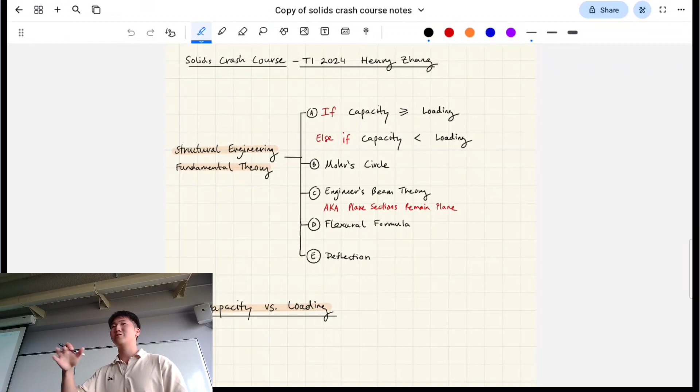Before we dive in, a bit of an overview. I like to start very general and get more specific. This course has a lot of formulas, especially at the start. The first 3-4 weeks will be rough, I won't lie. This course starts hard, and I think it gets easier. In contrast, fluids starts okay, then medium, then easy, then gets hard towards the end. But you'll find the right balance.

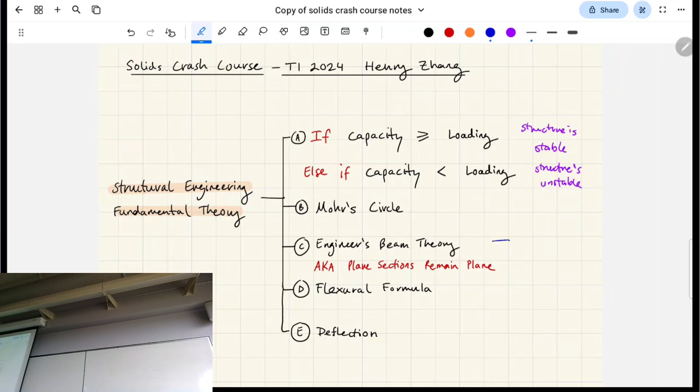Engineer's beam theory, flexural formula, and deflection - those are very important components, like outcomes of this course that you'll get as well. But that will be kind of covered from week 5 onwards, and Prash will be talking about it from a bit more theoretical point of view. Prash has a lot more experience than I am, and he's got some industry experience, and he's taught for a while, so he'll be able to tell you it from kind of that very applied point of view, so you can see how those things play into real life engineering design.

All right, so the first thing is capacity and loading. This is a very basic thing in theory, but I just want you to think about, for example, here's an I-beam - a steel I-beam. Can anyone think or tell me what gives this section of the I-beam its strength, and what causes it to fail?

I guess the loading on it, right? So I don't have any words or guesses to do this. Is it like tension? Tension is an example of loading. True. So actually, as a matter of fact, ENGG1300 is the only kind of mechanics/engineering studies related course that you've done so far, besides maths.

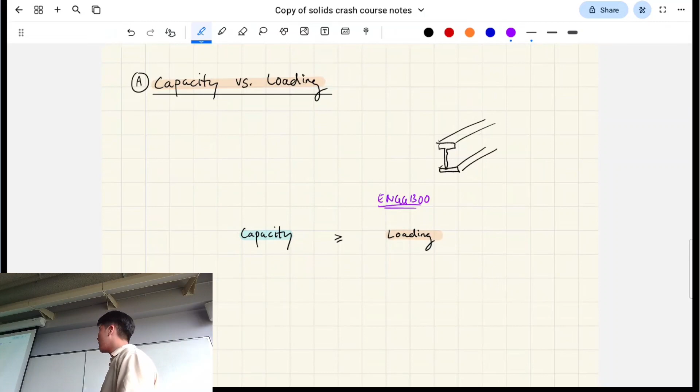ENGG1300, if you recall, you learned how to calculate these shear force diagrams, right? Maybe it looks something like that. And you learned how to do the moments, which might look something like that. Axial forces act on things like trusses - if you remember, there's your tension, your compression, all that stuff. That's all to do with loading, that's all to do with what causes the structure to break. So yeah, those would be examples.

Can anyone else think of what might give this I-beam its strength, for example? So, symmetry - so it's shape, right? 100% right.

So one thing we're going to be talking about is geometric properties - in fact, that's the first week of this course. Would you agree that the shape of this I-beam, if it was bigger or a different shape, say it was orientated like 90 degrees so it's like an H instead, it would have different properties in bending, or in shear, or even in tension and compression. The shape of it will affect its properties, and how much it's able to take. So that's what geometric property is all about.

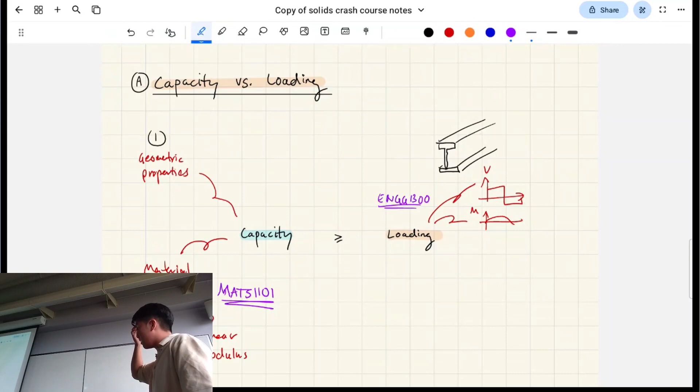So if you remember, there's elastic modulus, shear modulus - we'll be talking about these in a bit, so even if you haven't done this course, you'll be fine. The material - this is a steel I-beam potentially, but it could be made out of timber, for example, and they would have different capacities. And then where this course is going, as well as geometric properties, is we're going to be talking about stress and strain in quite a bit of detail.

It's kind of like week 2 and 3 material. Yeah, that's kind of a map of the start of the course. All right, like, yeah.

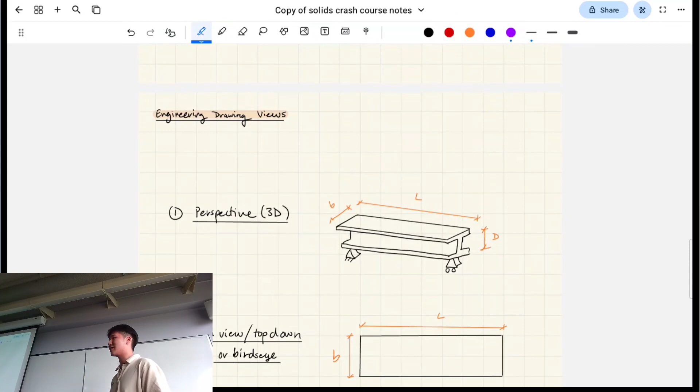A perspective drawing is basically like this. It uses up to 3 dimensions, and it's just to give people a better idea of what you're looking at, because humans can interpret 3D drawings a lot better than if you only isolate it to 2 dimensions.

Here's a plan view. When I say plan view or top down, it means bird's eye, looking at it top down. Your elevation view is potentially what you see in a lot of free body diagrams, where the vertical axis is where gravity acts. So that's just like side on.

Lastly, the cross section. This is very important for the first week's topic, talking about our geometric properties. Here I've used an I-beam as an example, a steel I-beam, but remember, we're looking at the cross-sectional area.

By the way, this is called a prismatic I-beam. It's called prismatic because if you remember geometry in year 9, a prism, like a triangular prism, is stretched across - it's the same shape, but just stretched across. So a prismatic I-beam means it's the same shape across the whole way.

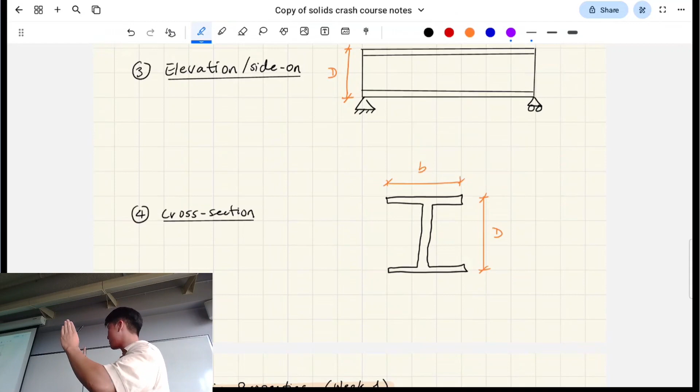So this will be geometric properties here. I'm telling you this because when I did this course, I didn't know what I was looking at - I was just like, oh, this is some shapes and stuff. But say this is on a beam, this is why it's important, because when you do steels, when you do concrete, you're going to be analyzing these cross sections of your beams when you're designing it.

Okay, does anyone have more questions? Or let's move on. So here's a perspective drawing of this I-beam, pretty much the same drawing that we've been doing. Take a second.

So here we have our centroidal axis. A centroid - you're going to hear this term come up every now and then. You guys all familiar with center of mass? Say you have a balance scale with two objects on either end, different weights and stuff - it's just the middle of where the weights of the whole system is, that's the center of mass. So our centroid is basically your center of shape. In this case, since it's a symmetrical shape, it's going to be right in the middle. So that's our centroidal axis.

We're looking at this I-beam here, and actually that's all I'll mention for now.

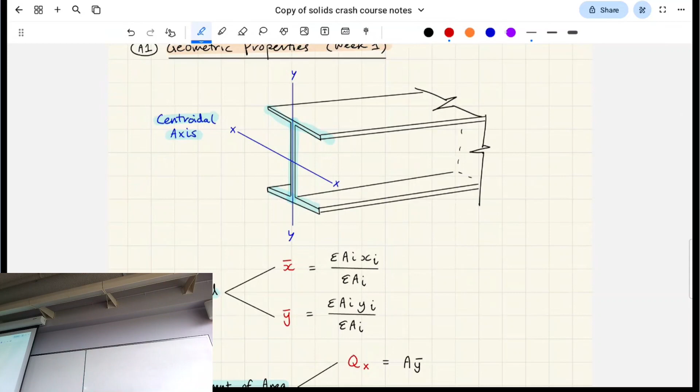Because if you have a T-beam, for example, which centroid is going to be in the middle and which one's going to be off center? Y is going to be off center. Exactly right - your y is going to be skewed towards the top because the majority of the shape is above the middle. Okay, all good so far? Yeah.

First moment of area won't be as much of a focus in the first weeks of the course, but I think it's going to come up later on, so I'll let him talk about it. Just note that it's essentially like taking moments, like in 1300 you take a moment, except instead of a force, you're doing area.

So what I mean is, do you remember the moments formula? You're taking a moment, except instead of force, it's area, right? Again, it isn't immediately obvious what this means, but this is just where it comes from. Don't worry about that for now.

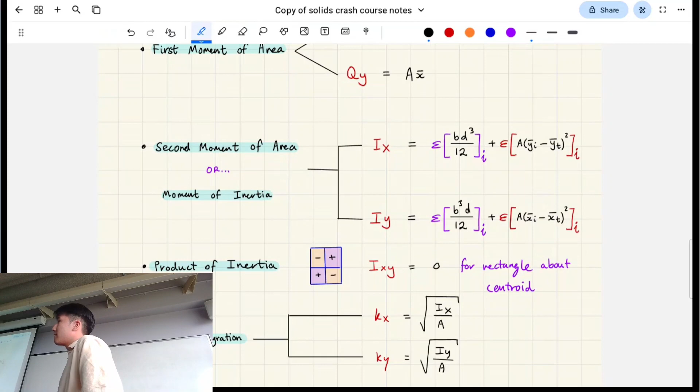Second moment of area, yeah, good question. I never remember QY. Is that pushing it around the x-axis and QX pushing it around the y-axis? Is that how to think about it? Let me think about that real quick.

So basically, if this is your x-axis, and this is your y centroid offset from it, I believe the first moment of area is flipping it that way. I think so, Prash, that's right. Yeah, he's nodding, so I think we're good. So, yeah, in that case, that one is referring to this, right? I'll leave that there for now.

But yeah, for second moment of area, this one's going to be the main focus. So there's a few things to break down here. The first one is that it's shape dependent, okay? This formula, I've only written it for the general case of a rectangle, okay?

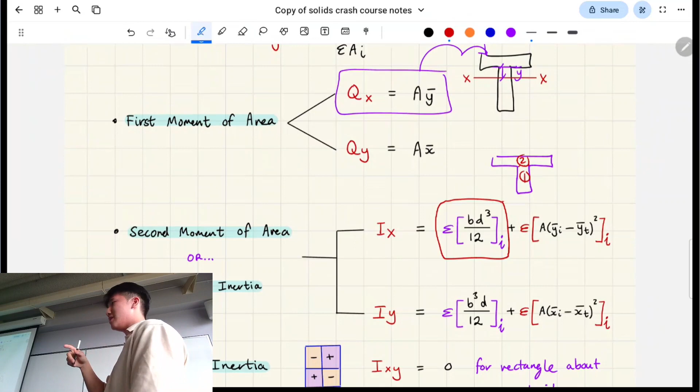So let's do a T-beam, for example. You can break up this T-beam into two shapes. You can break it up here if you like. Call that shape 1, call that shape 2. Essentially, this component here is saying you take B as the width, D as the depth of these shapes, and you add them together, okay?

So say this is like 20, and this one's like 100 — actually, let's use 30. So for this particular shape, you do it for shape 1. B is 20, and the depth is 50, to the power of 3 over 12. So this applies for a rectangle, and you add it onto shape 2. That's kind of how it slots in, right?

But then you have this part here — let's highlight it, sorry, it's gotten a little messy already. This component here is called the parallel axis theorem, and it's to do with the offset of the shape, okay? So essentially...

If you have a rectangular cross-section like that, it doesn't have an offset from its total centroid, right? So you don't need that parallel axis theorem shift. But if you were to make it a T-beam, then you have to account for the fact that this gives it additional bending resistance.

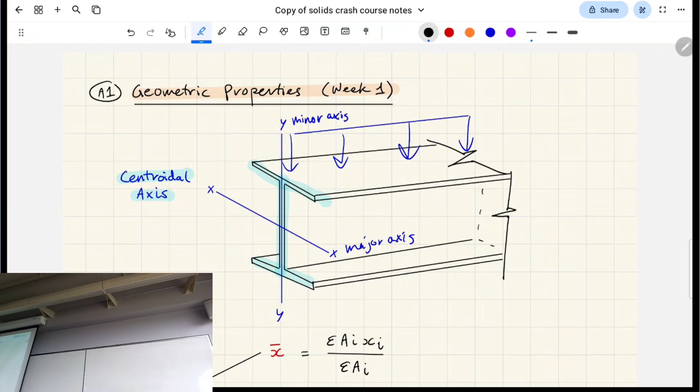So that's what the shape is optimized to do, essentially. In fact, you'll find that these I-beams will take something like 10 times more bending from the XX axis, which is called its major axis, as opposed to its minor axis. But yeah, there you go. Any questions on that? Cool.

Let's talk about the product of inertia. I'm going to call this the balance of area - that's kind of how you want to think about this mathematically. So essentially, for a rectangle about its centroid - what I've drawn here is a rectangular cross section - and here's this centroid.

Do you remember your quadrants from the unit circle? You can kind of think of it like that. So for each of these quadrants, that's what the maths for IXY is going to add or subtract from. So for this shape, it's 0 because they balance each other out.

For another shape, an I-beam for example, would this be positive, negative, or 0? Zero as well, because it still balances itself out. What about for this shape? Maybe that - would it be also 0? Yeah, it's also 0, because this part is positive, and this part's negative, and what I just highlighted will net to 0.

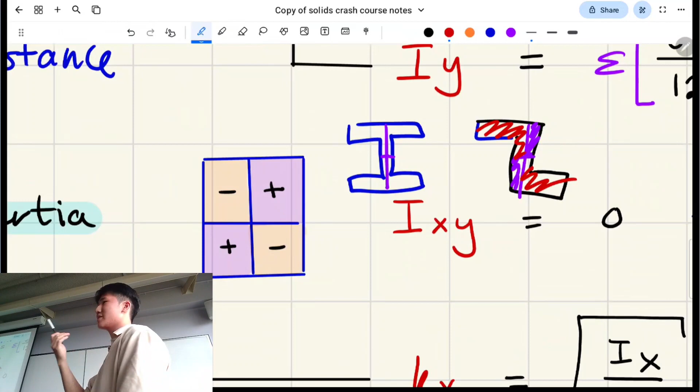Here's an example of a shape that isn't 0. Is that going to be positive or negative? Negative - it's going to be negative because the positive area is only this. But yeah, there'll be a formula for it. I actually don't think I've included it in these notes, but in Clarissa's formula sheet there'll be a formula to calculate your product of inertia properly. But yeah, that's like right off the bat you can just tell.

And radius of gyration - I'm not going to touch on this too much, partly because I don't know what it is, and Prash, you can cover for me later on that one. Mathematically, it's just: you have your total Ix and Iy that you've calculated, and the total area of your shape, and you can figure out the kx and ky from that. It's just like an extra step that I might ask you in the workshop questions and stuff.

All right, cool. So we're going to jump into an example here. I hope I don't run into overtime. Just give me a second.

So here we have a T-beam. I'm going to call the top shape here shape 1 and the bottom shape here shape 2. You've got the dimensions and everything. So one thing you want to think about is - from our - actually no, I'll talk about that in a bit.

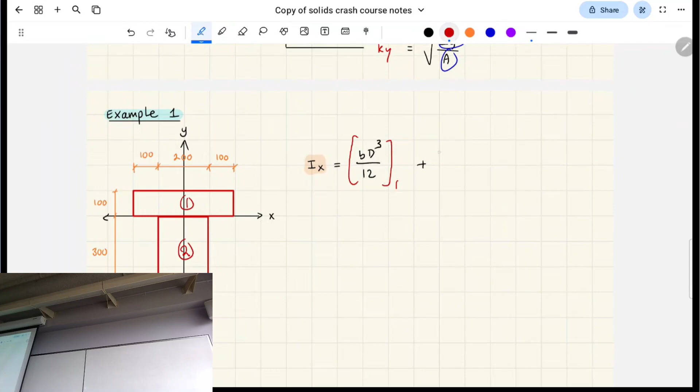Okay, so the formula - we saw the formula for Ix before, it goes like this. Except what I've written out here is only for shape 1, because we have to add on this formula again for shape 2. That's for shape 2.

And we have to account for the parallel axis theorem. The formula goes like this. I wrote the formula wrong - it's that with a squared. If you're looking at my notes, I wrote the formula wrong before, it's with the squared, pretty much.

Okay, we're going to plug in these numbers. Can someone tell me what B is for shape 1? The width? 400, correct. What about D? Yeah. What about shape 2, B? About 200, yeah, 200. What about D? 300, very good. All right, what about the area - you don't have to tell me what the area actually is, just what do I multiply together? 100 - not quite 100, oh well, 100 that way, yeah you're right, and 400, you see, 100.

Yeah, you got it, I was looking at the other dimension, you're right. Yep, so that's how we sub in the area. And then YT - we don't know YT because it's the centroid for the total shape, so we actually have to calculate that. But we do know Y1 hat and Y2 hat, and the way we get that is based off the defined axis - it's from the defined axis to the center of that shape, that's how much you have to shift it by. Is the defined axis given to you? Yep.

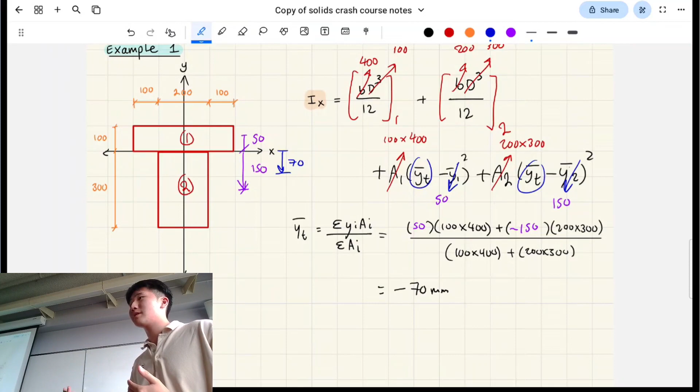And so what happens with the parallel axis theorem, I'm going to plug in negative 70 here. The reason why sometimes you might see this formula the other way around, you might see yi minus yt, is because it's squared anyway, so it doesn't matter which way around it is. All that matters is the difference between them.

Like if the defined axis is down here and you find this number instead, all that matters is the center of the shape to wherever. But there'll never be a case in a question where they don't give us the defined axis, right? Never.

If you're establishing it for yourself, say you're just doing a thought experiment where you want to find Ix for some random shape you made up, you can put the defined axis anywhere you want, and if you plug in the numbers right, you should get the same answer no matter what. That's how these formulas have worked out. That's pretty cool, it's like a datum.

Do you remember work energy in like 1300? Doesn't matter where your datum is, your change of height's gonna result in the same thing anyway.

Seems pretty reasonable. Not making sense? We should make a point. Can I just get your attention for one more second here?

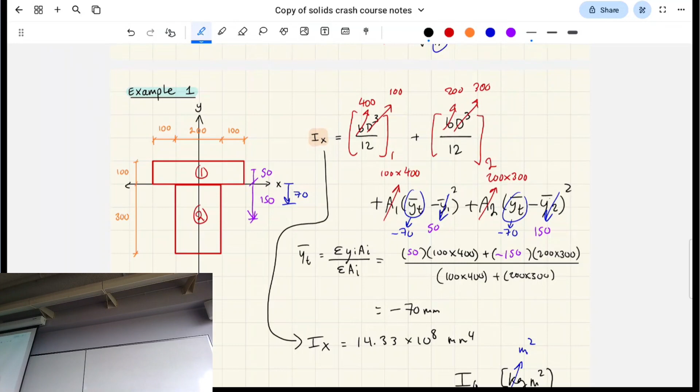Correct, correct. But what we're going to do is we're going to shift this 3 onto b, right? So that's going to move over. Same dimensions, but it'll look like this. That's the wrong one, let me delete that, sorry. It's this, right?

So b is the component which has the cube, right? And no shift, like you said. So because there's no shift, you don't have to calculate x hat. You don't have to find the total because you know it's right on the defined axis. So there's no shift required. Okay, any questions?

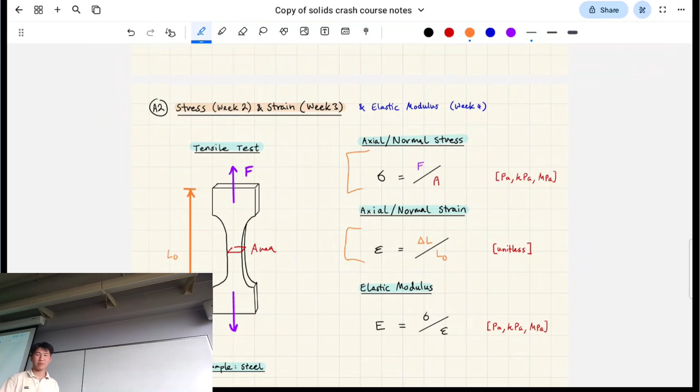You can get your axial/normal stress, and you get your axial/normal strain. So that's what I've denoted there. That Greek letter there is sigma, that's force over the area. That one there is epsilon, and that's your change in length over your original length, right? That one's unitless because we're doing meters over meters, and pascals is newtons over meters squared, right?

And elastic modulus is going to be your stress over your strain in the elastic portion of your material. So basically this varies per material, right? Which is why you need to do testing on it. It's a material property, right?

So here's an example, you've got steel, right? This portion here is considered your elastic portion, and here is considered your plastic area. Plastic is where there's irreversible deformation - like you unstretch it and it's still messed up, pretty much, right? That's what plastic means.

Essentially this slope here in the elastic region is your elastic modulus, and you get that from doing stress over strain. At this point is where it's yielded, and this point is your ultimate failure state, right?

Anyone have any questions to do with this? No? You'll see elastic modulus pop up starting from about week 4. But it's related to stress and strain, which is why I want to bring it up quickly here.

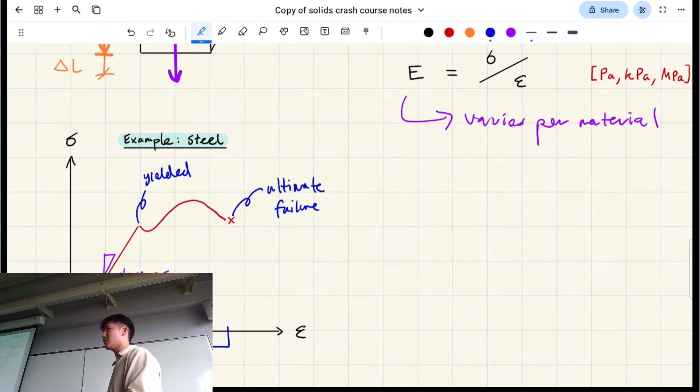I talked about this a little bit if you were here for the fluids workshop, but your shear modulus is also kind of to do with material properties, right? Except it's looking at different types of forces. So before we were talking about axial forces, such as like tension and compression. Shearing is like parallel to your surface, so it's like your tangential forces, essentially, right?

And in terms of deformation, we call that delta X. So that's going to be plugged into your shear strain here. That's shear strain, right?

Yeah, and gamma, right? Gamma is an annoying character because maybe in fluids you've seen it pop up as the unit weight, but in solids, yeah, it'll be your shear. It's referring to shear strain, right? Yep, and then you got shear modulus too. Any questions on this?

The only reason I bring this up is because it's going to be relevant when we're talking about the next topic, which is to do with stresses, specifically on a Mohr's circle. Yeah.

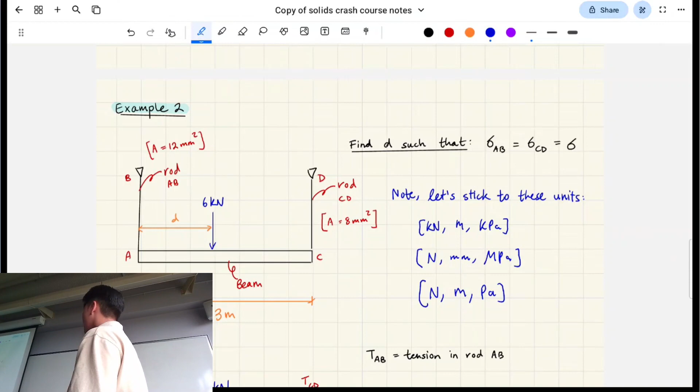When you stick with one of these sets of units, you kind of want to carry it through for calculations. Kilonewtons, meters, and kPa - those work really well in big scale questions, like beams and buildings and stuff like that. Newtons, millimeters, MPa - that's generally what you work with for stresses or looking at a cross section, smaller scale kind of questions. Anyway, so I'm going to be sticking to this one.

Okay, so firstly, can someone tell me what the basic formula is for axial stress? Does anyone remember - the one for sigma? Tiara? No, I'm kidding, you were like 'don't pick me.' Yeah, it's just force over area, right? The sigma is force over area.

I'm going to call the force in this question tension, T. So we're just going to replace that with T. So tension is just stress times area - just rearranged it.

Here, because our stresses we want it to be the same number anyway, I'm going to call the stress in AB and CD just sigma - it's going to be the same thing. So the tension in rod AB is going to be sigma multiplied by the area of AB - that's the thing that's going to change.

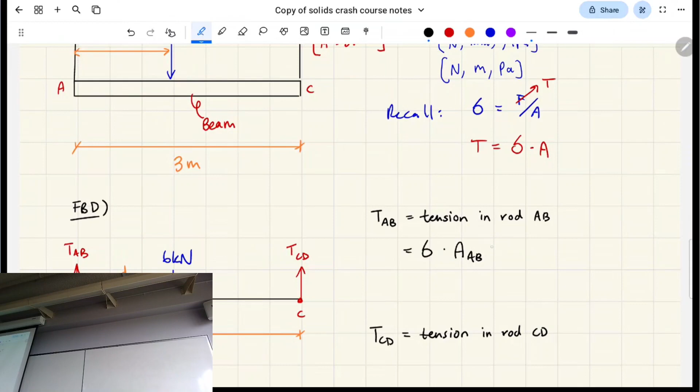So if you look up here, the area for rod AB is 12. Why is it both 12 and 8? Oh yep, sorry, I should have explained that. So rod AB has an area of 12 millimeters squared, but rod CD is a little bit slimmer - it's got a different area. So that's why this question will be off center.

So here I'm going to convert the units by doing this - you might or might not have seen this before. It's a bit funny, but I'm multiplying by meters squared and dividing by millimeters squared, so I'm going to get meters squared in the end. And there's 1 meter per 1,000 millimeters. So basically that gives me this. Right, so that's our area here.

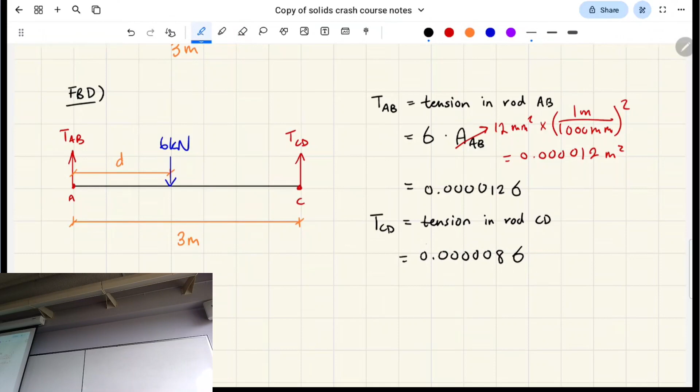And then when we multiply it by sigma, we just have our area, which is written like that, multiplied by sigma. Tension in rod CD here, we can do a very similar thing and end up with this. Done the same thing, just multiplied by sigma, our unknown.

Here I've drawn a free body diagram, so using your methods that you learned in engineering mechanics, sum of the forces in the y direction - actually, can someone tell me them? What are the forces do we have in the y direction here? Yep, that's one of them. Yep, basically, right. So I'm just going to add the arrows that I've drawn going up and subtract 6 kilonewtons - we're working in kilonewtons here.

Here I'm going to replace these with what we worked out, so we can work out that sigma - that gives us only one unknown. That's just that many kilopascals.

Taking the sum of the moments here, we're going to do moments now. So looking at this picture, can someone tell me the sum of the moments about A? So what kind of moments will we have going about this one here? Minus 6 times d - yep. Minus... oh, positive T_CD times 3. Yep, basically, so we're just taking the sum of the moments like we did back in 1300.

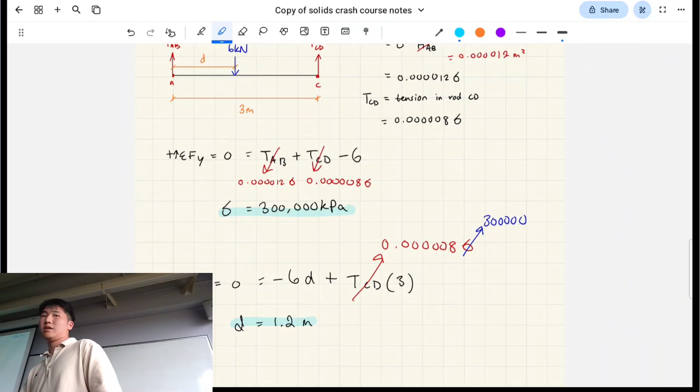Let me tell you something which I teach in 1300. You look at basically where the lines of action are for your unknowns. So we have here and here, like vertically, that's where our unknowns are. If you take the sum of moments about some random point here, you're going to end up with two unknowns. If you take it about A, you're only going to end up with one unknown because the lever arm on one of the unknowns is 0. And if you take it about C, yeah, you only have one unknown as well.

Does it make sense how this is tension, by the way, on the rods? Yeah. Okay, all good? Let's keep trucking.

So here, basically, let me introduce you to a 3D stress element. A stress element is pretty much like an imaginary thing, it's like the smallest unit. Basically, you have a random point in a structure, and you can look at an individual stress element happening at that point, and then you can analyze that point. So the stress element is representing the stresses which are happening at that point. It might not actually look like a cube, but it's representing it, kind of like how you represent an atom in chemistry.

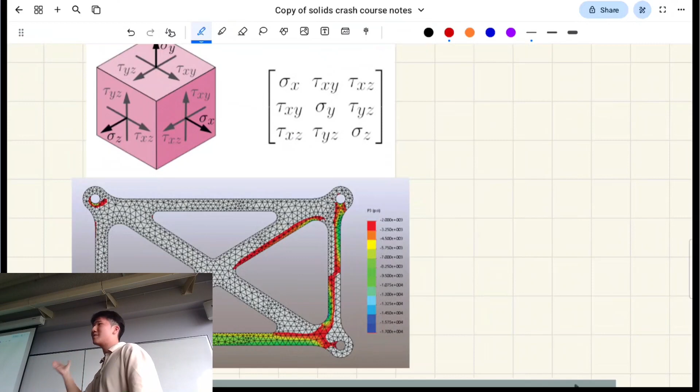Caden, does this look familiar? Yes, it does. Just to give a random example, this is a game on Steam called Poly Bridge, where you can build a truss bridge, and green is where there's areas of low stress, like low axial stress, and red is where there's high stress. So this is a perfect nerd engineering game, but it's an example of where stresses might be used, just for fun, just a little fun example.

So this is the version that you'll see in this course, right? Plane stress. All right, so the focus in this course.

Just keep in mind the directions of all these arrows because it's going to be important when you look at a stress element. So we're looking at the x direction and the y direction here, and when the arrow is pointing away from the center, that's going to be positive, like in trusses where tension is the positive direction. For shear, it's going to be pointing in the top right corner and the bottom left corner — those are the positive directions, if it's pointing the right way around. If it's pointing in the top left and bottom right, those are the negative directions for shear. Okay, you have to get pretty familiar with that.

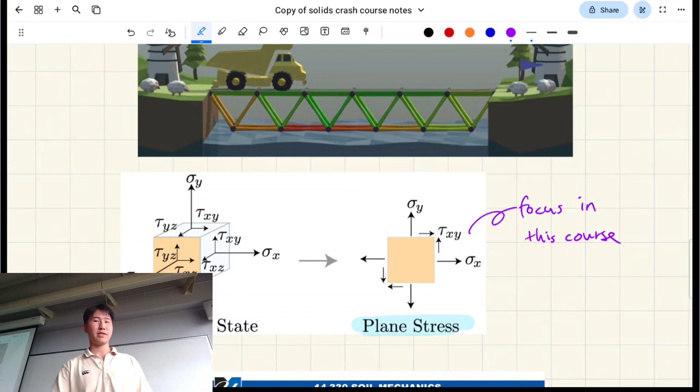In soil mechanics, which a lot of you will be doing in term 3, compression is the positive direction, right? Could anyone tell me why that might be for soil? So the question was, if you're analyzing a soil element, some point, you're analyzing the stress at some point in the soil, why would compression be the positive direction in soil mechanics?

Yeah, because as you go deeper and deeper into the earth, the soil's going to experience more compression. Whereas for a structure, I guess tension — that's when, for example, concrete is quite weak in tension, it's going to rip apart faster in tension. Yeah, I don't know, I just assume that's the reason, that's what I remember, right? Okay. I don't know, bro. Vibes.

Alright, so here might be a typical question in week 2. Here I've written down the principal stresses formula, I'll explain what that is. But this is what the formula looks like. Can someone tell me what I should plug in for these numbers? So sigma x, sigma y, and tau xy. So what do you reckon we'll plug into those numbers?

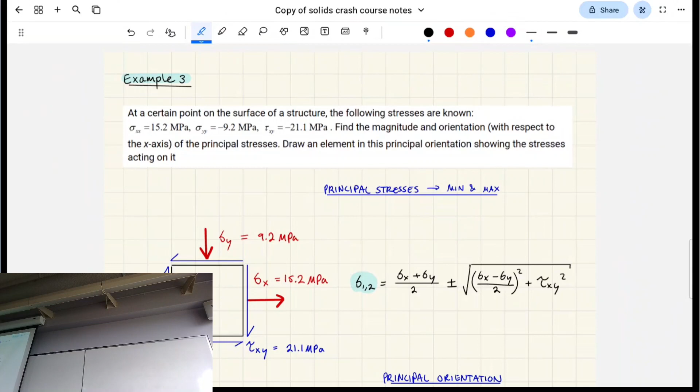Sigma x is 9.2... 15.2. Oh yeah, true, pretty much right. And then, just looking at this, what about sigma y? It says about the negative something. It's not quite 9.2, negative 9.2, right? That's because it's going to the top left or the bottom right. We're looking at the arrow, the axial arrow here. And if it's in compression, it's going to be negative. That's what you plug into the number.

Wait, so will all x shear forces be positive because we're up down? It's about the corner it's pointing in. So actually in this case here, it's pointing in the top left and bottom right. So it's going to be negative because that's the negative convention. Whereas if it was pointing in the top right and bottom left, that's the positive direction. So both of them are negative. How do I explain this? Am I looking at the red arrows right now? Oh, the blue arrows. But all the blue arrows are in the negative direction.

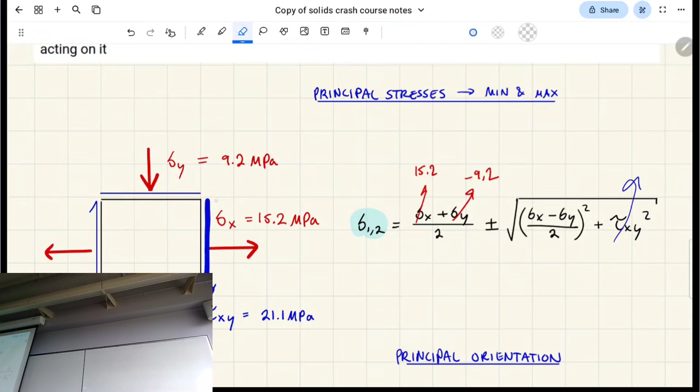Oh sorry, wait, so for tau you're looking at the blue arrows. Yeah, are they in the negative direction? Wait, let me redraw it. So these ones are pointing up and left, and these ones are pointing down and right. That's the negative direction, essentially, on a stress element. Wait, no, dude, never mind, don't worry about it, all good. Okay, just take my word for it for now, Caden, I'll tell you later.

Okay, so this will be 21, negative 21.1. It's going to be negative because it's pointing in the negative convention direction, right? Yeah.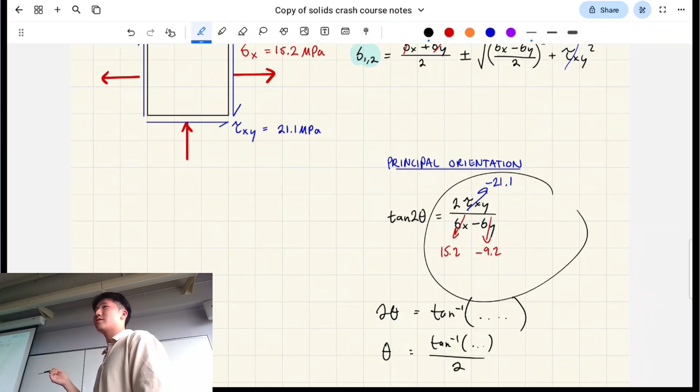The principal orientation, again, I'll show you what this looks like, it makes more sense on a Mohr's circle. But the principal orientation has this formula, but this isn't what we're going to be using directly to get the principal angle. We're going to sub in our numbers as we did before, and then whatever we got on the right-hand side here, we're going to take the tan inverse of whatever we got, and then we're going to divide it by 2, and that's going to give us our principal angle. I'll show you what that looks like on the circle, because the circle is quite good for visualizing what all these equations and stuff are actually plugging into.

That's the theta, is the stress or the angle? The angle. Okay, so firstly, wait, I'll show you on the circle. Wait, do you need to copy this down? Sorry.

Yeah, this is what a question will look like. From your tests, you know that in the x and the y direction, the stress element is giving 2 MPa in the x stress direction, and it's giving -1 in the y stress direction. These are the axial stresses we're talking about. And then for shear, it's giving -0.5 in your xy plane. But then this question particularly asks for 2 things. The first one is, what will the stresses be when we rotate this element 30 degrees? That's the first thing. This is called transformation - transformation is where you rotate it. And the other one is for the principal stresses and the angle at which the principal stresses occur. So I'll show you what this looks like on a circle.

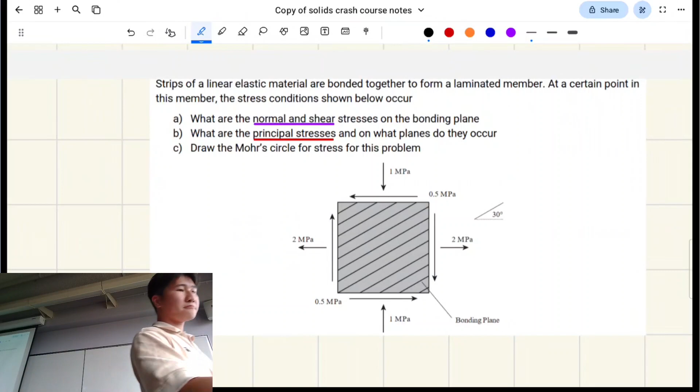Find the center of the circle and then find the radius. Exactly, so it's the center of the circle, plus or minus the radius of the circle. That's what the formula above was.

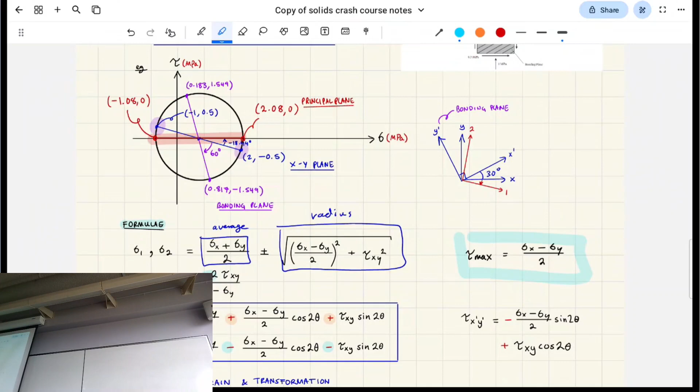Okay, alright. Before I take up too much more time, I'm gonna talk about how this relates, because the reason I bring up that the Mohr's circle is very important is because it's in week 1, 2, and 3. So you talk about it in terms of moments of inertia as well.

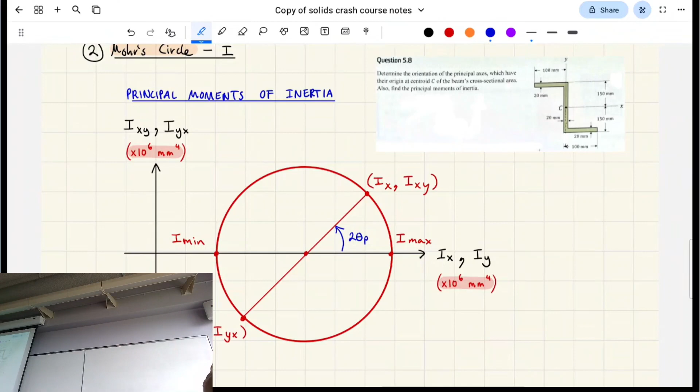Here's a question, for example, I've included. You have this shape, and it's asking for the principal moment of inertia and the moments of inertia. I don't know if that one-to-one corresponds to the question, but you can plot it on a Mohr's circle once you've figured out Ix, Iy, and your product as well. Those are the formulas there as well that I've included.

You can do the same thing where you rotate your shape, say 30 degrees, and graph it on a Mohr's circle based on this rotation. Those are the formulas there. Note that these look a little bit different. In orange and blue, I've highlighted for your moment of inertia, it's plus minus and minus plus. But if you look at the stress one, that one's plus plus and minus minus. So they look a little bit different.

As well as this one, that looks a little bit different from this one, which is minus. Is that just something you have to remember, or is it given? No, you have a data sheet - these ones are harder to memorize.

What's U and V? Oh, what - initial final.

So you have your XY plane, right? Your U and V planes is just your rotated plane, and they're all orthogonal - they're like 90 degrees from each other, pretty much. That's all you need to define a 2D plane. Wait, what was it - perpendicular? Oh yeah, they're perpendicular from each other. Yeah, that's the other word for it.

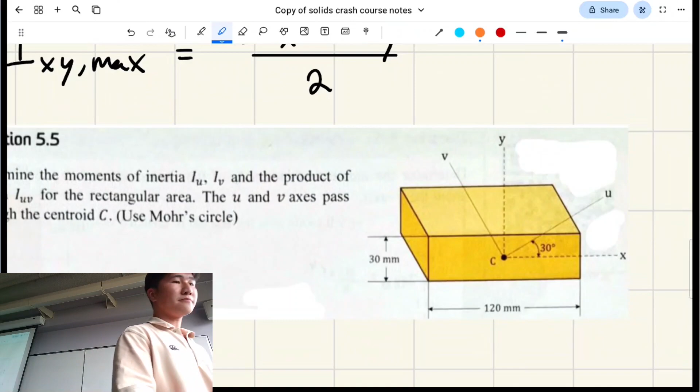That's what your UV plane is - it's just your rotated plane. And usually 1, 2 refers to your max and min, so 1 being the bigger one, 2 being the smaller one.

And lastly, I'll just quickly talk about this one - this is strain. Strain's a little bit weird because it follows similar patterns in terms of sign to stress, but when you're plotting on a Mohr's circle, you have your shear strain divided by 2 on one axis. And the reason for that is this is a strain element.

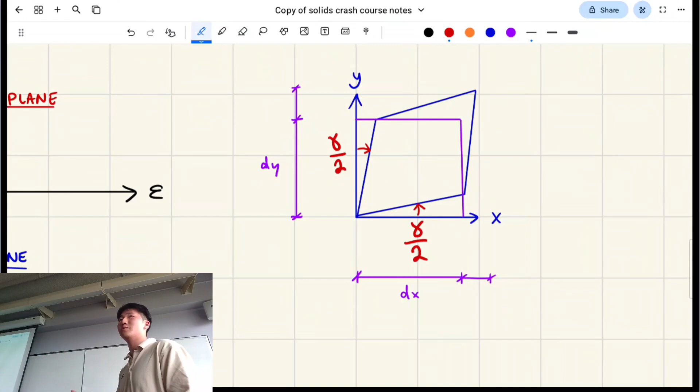The strain element looks something like that. As shear strain is applied to it, it kind of squeezes from two points. I don't know how else to put it. Because of that, it's going to change a couple of our formulas. By the way, how you would represent this is dy epsilon y.

So is it not squeezing from the ends? Is it just squeezing from the middle of the shape? What do you mean, sir? I mean, is it like gamma divided by 2 because it's applied to the middle of the shape?

There's a couple of ways you can draw it. For the stress element, say we have this stress element rotating at 30 degrees, for example. You could draw it like this. You can draw it like that, right? But you can also draw it maybe like this—I don't know, this one's a bit messier, but you can draw it like this too.

And so the same thing here—don't think of this element like it's rotating. I think the way they've drawn it here is just the most elegant way to represent it, you know what I mean?

Wait, so is the purple square the original? Yeah, it's the original shape. The blue square is the shear strained shape, not the rotation. So it hasn't been rotated, we're just...

Wait, so what was the point of the rotation explanation? I haven't explained rotation for strain yet—this is a different element, a strain element, not a stress element right now. Yeah, but you were trying to explain something. Oh, right.

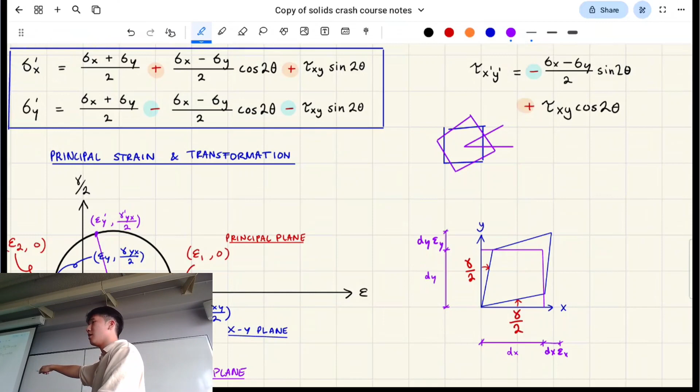So kind of what I've drawn here is a stress element that's rotated, for example. It doesn't really... actually, I think this is a bad explanation. I think what I'm just trying to tell you is that this is just the most elegant way to represent the strain element. Don't think of it like it's being squeezed from one corner and it moves or whatever—it's just the best way so it doesn't overlap with itself.

Sorry, that's okay. I'm just going to cover the rest of the course, but not in detail, because it would sort of defeat the purpose. So the idea behind today hopefully is that Henry gives you an idea in a more detailed way of what's happening in the first two or three weeks, so that'll give you a head start so when you're looking at the lectures, you're not lost.

So that was these first three topics. These four topics are what's going to be covered later on in the course. I'm not going to go into too much detail, but I'll explain to you conceptually what each of those are, and then we'll wrap it up for today. Okay, so sorry, this was covered, and this.

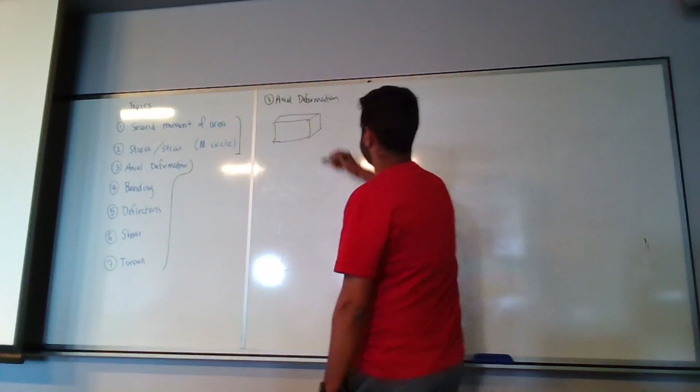So the first thing to talk about here is axial deformation. Axial deformation builds on what Henry covered for stress and strain. Really simply put, if you have a rectangular cube or a rod, and that's the cross-section area—let's call this A—and this is the force N. Axial deformation just looks at how to calculate exactly what that axial deformation is.

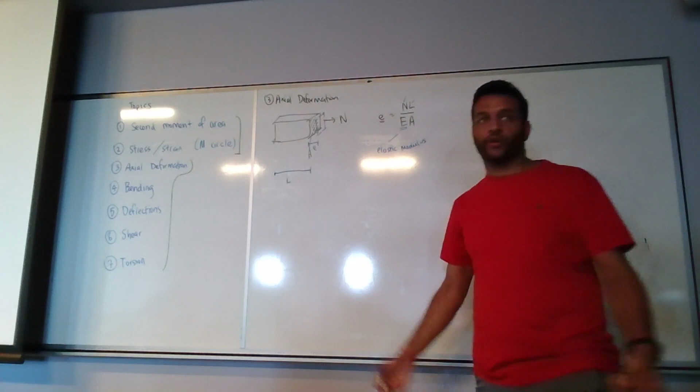For example, E equals NL over EA. If E is the deformation that's caused—the axial deformation—this whole thing just kind of moves like that by E. N is the force applied, L is the original length of the element, E is the elastic modulus, which is a material property—every material has a different elastic modulus. Steel has a modulus of 200 gigapascals, concrete will have a different elastic modulus, whatever material you're using given the question. A is the cross-sectional area over which the force is applied. It's really simple, that's what axial deformation is.

Now, the important thing to take note of is units. Henry covered the unit combinations that work well in a given formula because the dimensionality is conserved—so if you're sticking with SI units, then you stick with SI units.

If you're using millimeters and newtons, the most common unit combination you can use here is millimeters for all lengths, newtons for all forces, and MPa for all stresses. If you want to use SI units, that's fine too.

But in our course, this will probably be the most useful because your dimensions are usually given in millimeters. You just have to be careful: if a question tells you the elastic modulus for steel is 200 gigapascals, you need to convert that to megapascals before plugging it into the formula, and then everything will make sense. So if you're expecting a length dimension to come out, that length will be in millimeters if you stick to this.

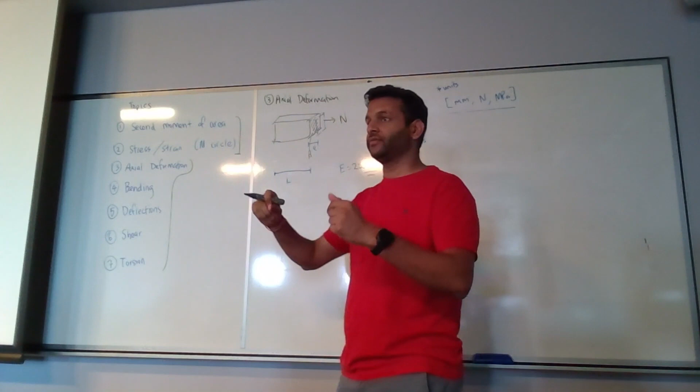Where it gets slightly more complicated is if the element has a weird shape. Look at this formula: we have N, and N is consistent over every cross section of this element. I'm applying the force here at the end, but this force is also experienced all the way through—the force stays the same throughout the entire element longitudinally. Next, the original length obviously doesn't change with shape, so it stays the same. The elastic modulus stays the same too, since it's one material, not two. And the cross-section area also stays the same. That's why we can use this simple formula.

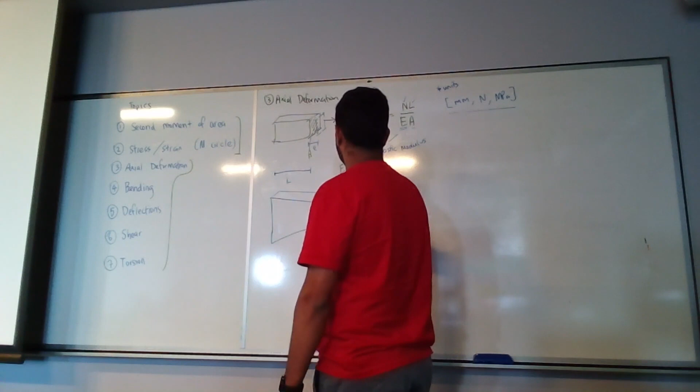But if any of these things change—like if your area is changing, which means you've got a shape, something like this, and you're pulling this—now that's different, because the cross-section area changes across the length of the element.

So in a question like this, let's say the force here is N, and that's the area at the end. Let me give you an axis here—let's call this Y and let's call this X. Not the same Y and X that Henry was talking about, I'm just giving you an axis. So let's have a look at this.

Let's say the question is asking you to calculate what the axial deformation is. This formula still holds, but we have to look at it a bit differently now. Let's see what's changing across the length. Does N stay the same across this entire length? I think it's no. So does N increase or decrease? It doesn't increase or decrease, but it spreads out more across the shape, I would guess.

So you're talking about stress or force? Not force—force stays the same. If I'm applying 100 kilonewtons here, there's 100 kilonewtons here as well. So the force stays the same, but the stress changes because the area changes. Is there more stress at this end? Yeah, because the area is tinier, but the same force is going through. So N stays the same throughout.

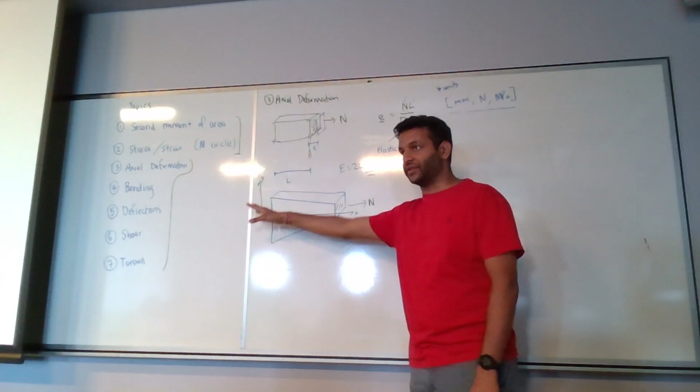The area changes—so you look at the formula and highlight what's changing. Now, how is it changing? Is it changing in a discrete manner or continuously? Here it's changing continuously; if it was changing discretely, that would be something like this, with distinct shapes. In that case, when the area changes discretely, we can still use this formula, it just holds at discrete steps. So this is shape 1, shape 2, shape 3, and there's some force N pulling this entire thing apart.

All right, the total elastic deformation will be NL1 over EA1 — let's say this is L1 — plus NL2 over EA2, plus NL3 over EA3.

Make sense? The formula holds at discrete steps, okay? So when it changes discretely, it's still pretty simple, right? It becomes more of a problem when now we're looking at this.

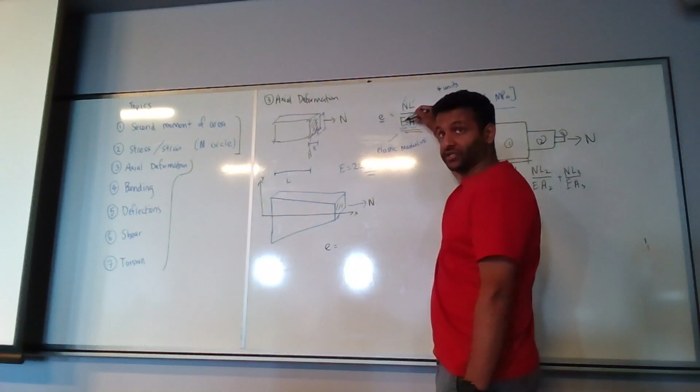Because it's continuously changing, let's break this formula up. We're still trying to find E. What is constant? N, L, and elastic modulus are constant, so I can write that down here.

But area is changing with respect to x. So let me write area here, but because it's changing with respect to x, you have to account for that. You take all the constants out, and the thing that's changing, you find out what it's changing with respect to, and you write that down first.

Now our next job is: area changes with respect to x in a certain relationship. Say when x is equal to 0, the area is pretty huge. When x equals whatever number according to the length, that area is smaller. So our job is to figure out what that equation looks like based on the geometry — and that's purely a geometry thing, it just depends on what the shape is.

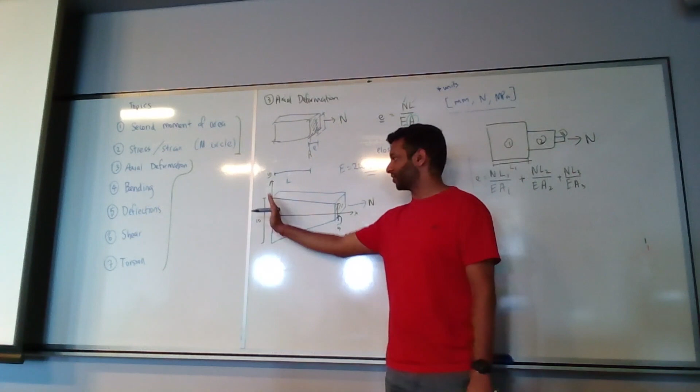Let's draw it a bit more. Say this is y, and let's say this is some number 10, this is some number 5. I'm sure you will be able to work out a relationship between the cross-section area here. Let's say this width stays the same, and this width stays the same.

You should be able to figure out a formula for area as x goes from 0 to — let's give this a number — let's say this is 20. And that formula for area will be in terms of x.

Everyone following so far? This will be a formula with just a bunch of x's inside, calculating the area as it changes from x equals 0 to x equals 20. Your upper and lower limits will be 0 and 20. Then it's just a math question, and you get your answer.

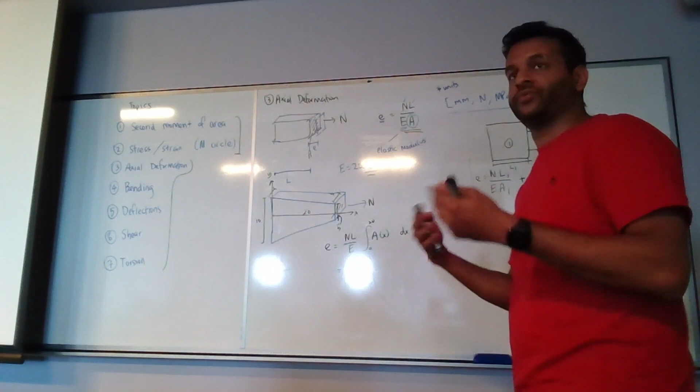In a nutshell, that's really what it is. The only thing that changes depending on the question is what exactly that shape is. You won't be getting any complicated shapes — it's just going to be something basic that you can solve.

The point of the topic is not to test you on how to define a shape mathematically, because it's not a math subject. It's just for you to recognize that this is changing with respect to x, and these don't change — therefore that's how you calculate elongation.

Make sense? Okay, the last part of this — let's go back to discrete. This makes sense when I'm pulling it this way. Now, what if I give you a question now that looks like this?

Okay, let me give you some numbers. So this is 10, 20. Let's say the 20 is applied across — sorry, it's not two 20s. Let me just put it here. Okay, now the question is asking you how much is this thing going to get squished?

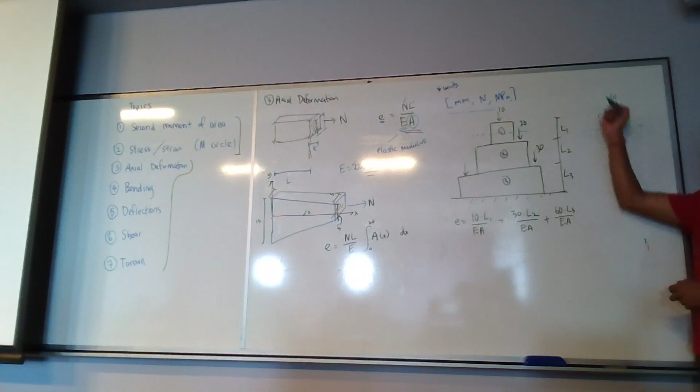If it ever gets confusing how much force is going through a particular point, very simple, all you gotta do is just take a cut at any point here, and then you can draw that out. Ask yourself, there's 10 there, how much axial force is going through here? It has to balance out, so it's 10. If you take a cut here and just focus on everything above, how much axial force is moving through the shape? It's 30 because there's only 10 and 20 on the side. And then you can take a cut here and it'll be 10, 20, and 30.

Okay, so that is axial deformation in a nutshell. Questions on this? No? Alright, so those are the basic principles of axial deformation.

Should I take a photo of you, Robert? Yeah. Yes. Cool. Alright, now let's talk about bending.

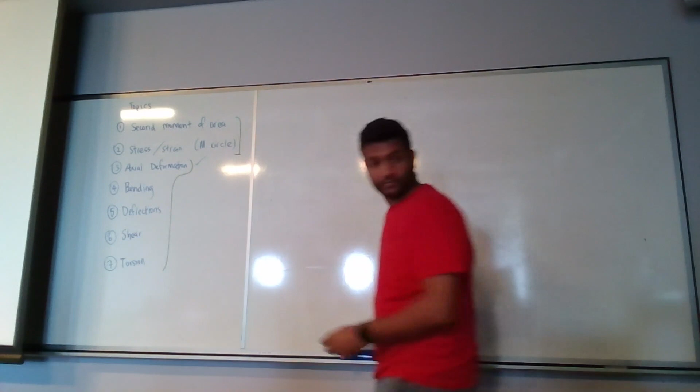Bending. Okay, when it comes to bending, that's what Henry was talking about, which is the engineer's flexural theory. There are two types of bending you'll look at in this course, or three actually: one is elastic bending, one is inelastic, and one is composite. Okay, so I'm just going to touch on each of these conceptually. Elastic bending refers to the bending of an element that is completely elastic.

Okay, so for example, let's say you have a beam here which is supported on two sides. You've got a pin on one side, you've got a roller on the other, and let me just give it some thickness, and let me put a load on here. Now let's say this load is 40 kilonewtons. Can you guys tell me what the reaction forces are? 20? 20? Yeah, of course, just assuming, let's say this is 3 meters, this is 3 meters. So the reaction force here is 20, and here is 20.

Any horizontal reaction forces here? No, okay, because you only have vertical forces. Alright, so these are the reaction forces. Okay, now this is just a recap of 1300, by the way.

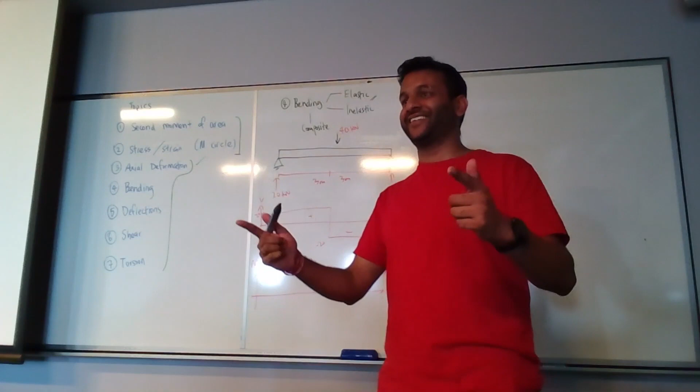Alright, now let's look at the bending moment diagram. Now before I do this, can I ask you guys, how many of you are doing civil engineering? Sick, alright. Sorry, who's not doing civil engineering? I guess all doing civil engineering. Oh, so yeah, okay, brilliant.

Now the reason why I bring this up is because there is a sign convention for bending moment diagrams that is only relevant for civil engineering, but for every other engineering, it's the other way around. What I mean by that is, when it comes to civil, or more specifically structural engineering, positive is below and negative is on top, for a very good reason. But for every other type of engineering, it may not really be relevant, because the type of analysis you do would be different.

So in structural engineering, the reason why positive is written on the bottom and negative is on the top is because you want the bending moment diagram to be drawn on the tension side. Okay, so what will the bending moment diagram look like for this triangle, above or below? Below if it's positive, right. Okay, and then you can work out whatever this is. What is it? Yeah, 20 times 3. 60, right. Okay, alright, that's the bending moment diagram.

Now, why is it drawn like this? It's because when you bend this physically, how will this deform? It'll kind of move like that.

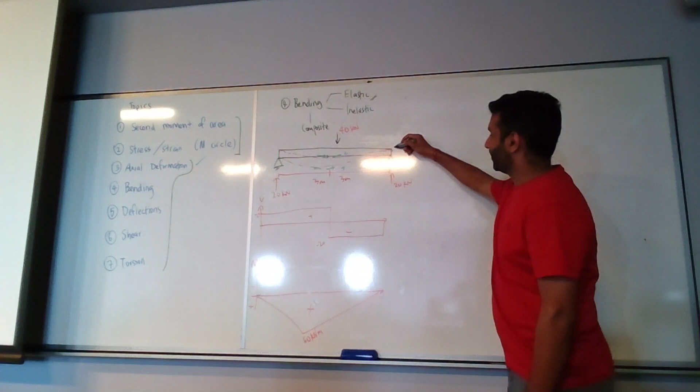So tension is on the bottom and compression is on the top when you bend it like this. So if I were to look at the cross section, let's say this is just a rectangular cross section like that. If I were to draw out the cross section here at this point, it'll look like that.

Now, we've already determined that compression's on the top, tension's on the bottom. If I draw this stress diagram out, let's say this is the compression side and this is the tension side, it might look something like this. Now, the way to actually visualize it is this is the cross section.

So if this is sticking out of the board, that's the beam. It's going to be weird, but try to imagine this drawn this way on top of it. So your compression is sticking out and then your tension is like into the board. That just means that this entire part is in compression and this entire part is in tension.

Increasingly so, which means there's zero stress here, and as you move away from the neutral axis, so this thing here, which is where your centroid is - that's why it's important to understand how to calculate centroids - that centroid is called the neutral axis. As you move away from the neutral axis on the compression side, the compression increases more and more. As you move downwards, the tension becomes more and more. Make sense? Being able to draw this correctly is a big part of elastic bending.

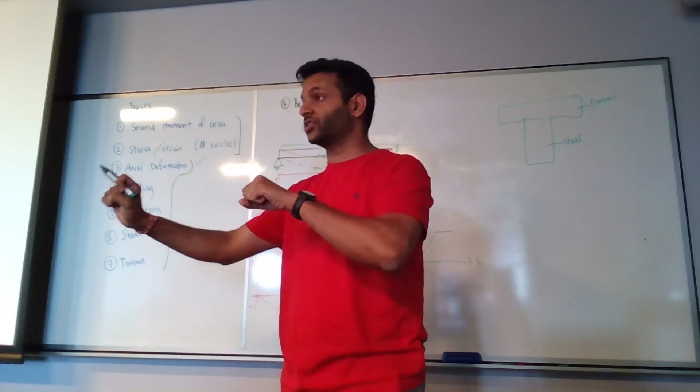So let's say you've got a particular shape, and the shape is the same. Two identical pieces, one is timber, one is steel. You basically apply the same force on both, so 500 kilonewtons on steel, 500 kilonewtons on timber. Which one is experiencing more stress? Neither, right? Very good, because their areas are the same, the shape is the same. F over A. Okay, but which is gonna be a trigger — no, you're right, that's exactly it.

But in a case like this, if it was all the same material, what would happen? It's elastic bending. If I were to draw the stress distribution, it would look like that, if it was all the same material.

But because these two are composite with each other, which means the steel isn't working independently from the timber, they're both bending together. In that case, what will happen is the one with the higher elastic modulus is the one that takes the larger stress. So which has a larger elastic modulus, steel or timber? Timber has the larger one. Oh, elastic modulus.

Steel is the stronger one, right? Think about it, the one that has the lower elastic modulus is the one that bends more for the same load. So if I take a piece of timber and bend it, it'll bend a lot. The one that will break. So elastic modulus is stiffness, how much it's going to deform based on the stress you apply to those atoms. So it feels stiffer, that's the highest slope on the graph. For example, if I were to draw it out like that, stress and strain, that would be steel, this is timber.

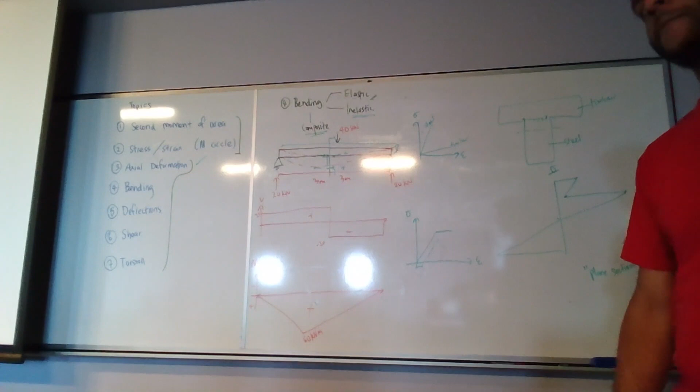Not on this, but how would the strain diagram look for an inelastic bend? It will still look like this. Is that the same? Yeah, because just because something has yielded doesn't mean it can't continue to deform. An object can continue to deform even though it doesn't accumulate any more stress—it just means it's yielded.

It's deformed. So see here, as you're going up this elastic ladder, yes, you need more stress to get more strain, but once you reach this point, you can keep straining it and it won't accumulate any more stress. Basically it's like a rubber band—once you stretch it enough and it goes plastic, it becomes so easy to just pull, and you've just messed it up. Or like Play-Doh or something.

Can I erase this? Yeah. Okay.

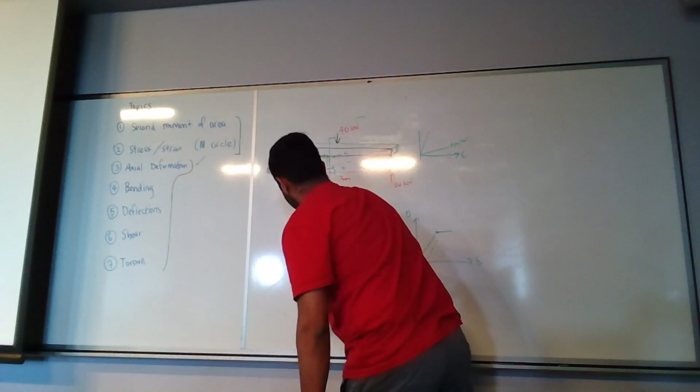All right, let's talk about deflections. This is just a way for you to calculate how much something deflects under a given load. So for example, let's say we have this beam.

It's a piece of steel, and I've got a force here, say 20 kilonewtons, in the middle of, say, 10 meters long. I want to jump straight to the bending moment diagram. Can anyone tell me what it's going to look like? Yes, it's the same as what we had before, right—triangle at the bottom. What is the maximum moment?

Sure? Is that 2? Yeah, sorry, this is 20 kilonewtons. So that's 10, that's 10. What's the moment here? No, this is not the shear force, this is the bending moment diagram.

50? Yeah, 50. 10 times 5. All agree? Okay, 50 kilonewton meters.

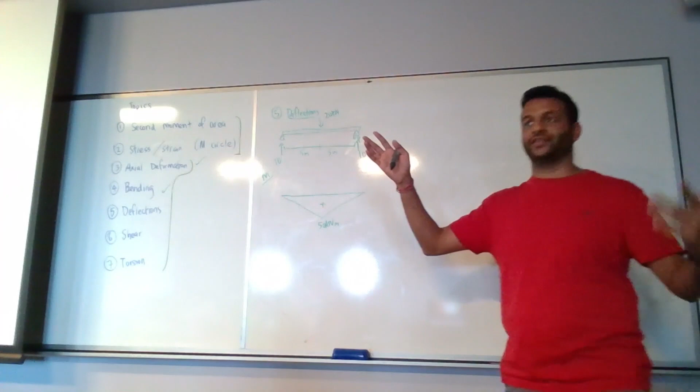So again, I'm drawing it using the civil convention. It'll be better if you're actually going to do civil engineering to get used to this, because it'll mess you up if you learn it wrong the first way around. You'll be struggling for the next few years when you look at a bending moment diagram with no signs, that's even worse. So just remember, it's always on the tension side. That's the bending moment diagram.

Now, what this topic covers is a formula to calculate deflections. I'll write down the formula here for you: EI, d squared v over dx squared, equals negative Mx.

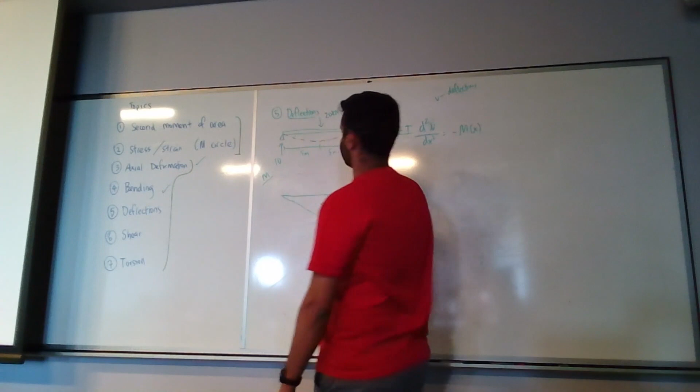What this basically is, v is deflection. Think about it, what will the deflected shape for this beam look like? It'll look like this. So deflection is a function that you can represent in terms of x. At x equals 0, v is equal to 0. At x equals 10, v is equal to 0. At x equals 5, v is v max. So v is an equation in terms of x.

Is that negative Mx a function of x, or is that multiplied? No, sorry, it's a function of x. So remember, v is a function of x, and moment is also a function of x. At x equals 0, M is 0. At x equals 10, M is 0. At x equals 5, M is 50. M is a function that you can represent in terms of x, but that function of M is two lines - you've got your first line here and your second line here.

This, most likely, you can represent in one equation - v in terms of x, which is the equation of this curve. If you take this curve and differentiate it twice, that's what this is. If you write out the equation for M, which is a function of x, that's what this is. And EI is just your material and geometric constants.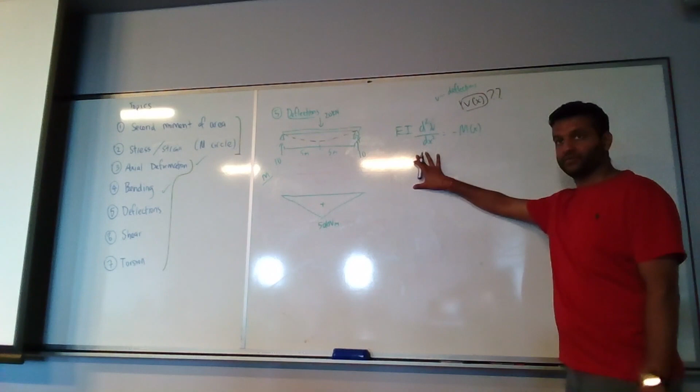The point of this is, I want to find out what my v of x is. I don't know what this is, because I want to calculate the deflections. So you start off from here - I know what this is, because that's this. I can write out an equation for M in terms of x, and you've learned that in 1300.

So once I have this, then I can integrate this twice - it's simple integration, not super complicated. You will get EI v of x equals some stuff here with 2 constants, because you've integrated twice, you'll get 2 constants. So our job now is to just remove these constants.

How do we do that? We've got some information: at x equals 0, v is equal to 0, just because I know what the deflected shape is going to look like. At x equals 0, v is 0. At x equals 10, v is 0. These two will be enough to get rid of that constant. And now you'll have an equation for what v of x is. You can throw EI on the other side, it doesn't matter. And now you can find the deflection for wherever you want in your beam.

In a nutshell, that's what the deflection topic is. Deflection just means how much it goes down, or up, depending on the loading. Basically, once you've loaded it, what's it going to look like - the final shape.

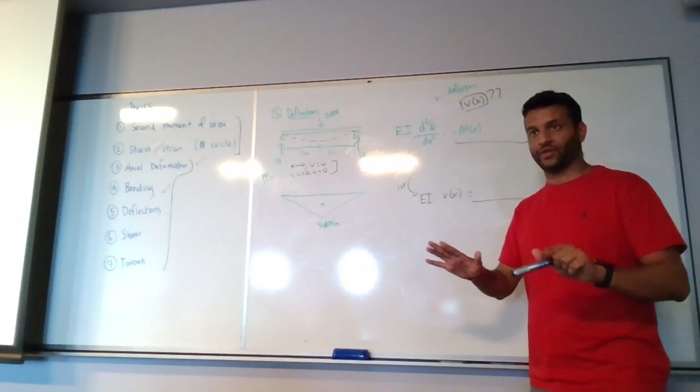Question on this? Makes sense? The idea is just to convey to you conceptually what this is - don't get bogged down in the formulas. When you get to the formulas, you'll figure it out. We've got two more which we can talk about together.

Alright, the last two topics are shear and torsion. They're not the same thing, obviously, but I'll just discuss them together.

So, shear first. Now, what shear is, in the context of a beam, I really like discussing this with civil engineering students, because if there are students from aerospace engineering, they'd be like, wait, so in a spaceship? And I'm like, you've lost me. Because I'll spend the whole term talking about buildings, and then I'll say gravity is always 9.81, and the aerospace student is like, no, it's not always 9.81, and I'm like, you've lost me. Someone was like, why isn't it like 2? And I'm like, what do you mean?

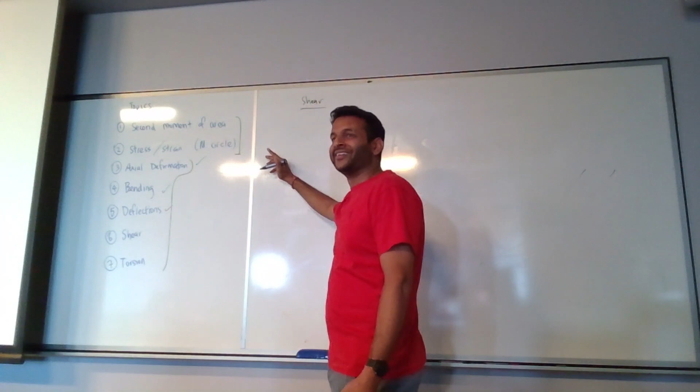Okay, alright. Let's say we have a beam like that, and there is a force here. What happens, let's say there's 2 forces like that, that's pushing it apart. What happens is this cross section here, that's in the middle of these 2 forces, right? That's basically what a shearing action is. So in longitudinal terms, if you've got a beam and you hold it like that and try to move it up and down, that movement is what shearing is.

Okay, and when this shears, we get this sort of action that's happening on the stress block, just on the cross section. The way you would draw the shear would be, and this is important again, so I'll reiterate what Henry discussed earlier. The convention for positive and negative shear, you can either memorize what it looks like, or picture an origin on your top right hand corner. If the arrows are moving in the negative direction from your top right hand corner, then that entire thing is negative shear. So the sign convention for shear is really, really important. And if, with respect to your top right hand corner, these are your arrows, then that's positive shear. You'll never find it where that's happening, because that's not equilibrium. This will never happen. So that's how you know what your stress block looks like.

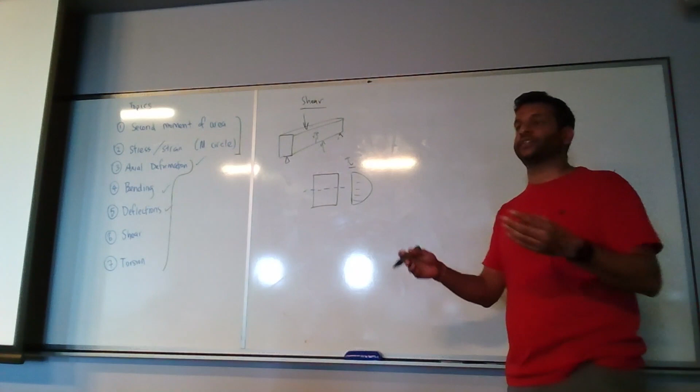Now, the interesting thing here about shear is it doesn't flow through your system, through your cross section, in a uniform manner. It won't, because it depends on the shape. So if I draw out some of the stress distributions for shear, it'll look something like this. If I'm drawing a shear stress, which is tau, by the way, that's how we denote shear stress, a graph of how this cross section experiences shear stress looks like this. Which means at the tips it's not experiencing that much shear stress, and in the middle it's experiencing the most. So in symmetric shapes, at the neutral axis is where you get maximum shear. And that's why in buildings, if you have a steel element undergoing a lot of shear, the propagation of failure tends to happen from the middle, if it's shear failure. Different for concrete, because in real life you've got reinforced concrete, so you've got steel going through the concrete. It might not necessarily be symmetrical, but in a perfectly symmetrical object, if you try to shear it, the shear damage will propagate from the middle, because that's where the largest shear is.

And of course for different shapes it'll be different. So for example, if you have an I-beam and you're applying shear to it, the graph will look something like this. There's less area here on the top, so it'll be less shear, and then it'll basically peak out like that, and then come back here at the ends.

So for an I-beam, when it comes to shear, what is doing most of the work? These two horizontal things here, or the vertical thing here? What is doing most of the resistance to shear? The middle one, exactly, is doing most of the resistance. It's experiencing the most shear. This is shear stress. That's why an I-beam is really, really optimized. Because when it comes to bending, by the way, in an I-beam, these things are called flanges, and these things are called webs.

So what does most of the work in bending, a flange or a web?

For bending, the flange is key. If you imagine the bending stress diagram I drew out earlier, the maximum stresses are at the ends. So in bending, the flanges do most of the work.

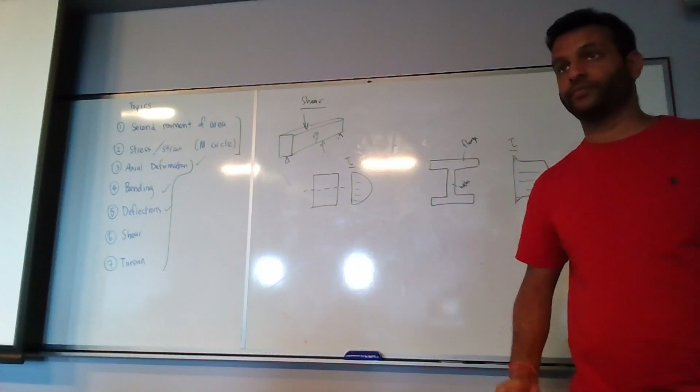It might be helpful to draw up the tau formula with the B, or the width, as well. So I'll draw this out here for you. The point of this chapter is basically to calculate on this graph what any of these points are.

The question is asking you: what is the shear stress at this height, or this height, or this height? You should be able to get that. And the formula for that is VQ over IB.

I don't want to go into too much detail, but basically V is the entire shear force being applied on the entire cross section. I is the second moment of area - it keeps coming up again, that's why it's really important to get good at calculating second moment of area, because it's going to haunt you for the rest of the course.

And if you become a structural engineer, it'll haunt your life too. So B is the width of the section you're taking a cut at, and Q is your first moment of area, which is what we talked about earlier - AY, which is also called shear flow.

I'm not going to touch on this too much, just because then you'll probably forget it. But again, conceptually, my point is to just convey this to you conceptually.

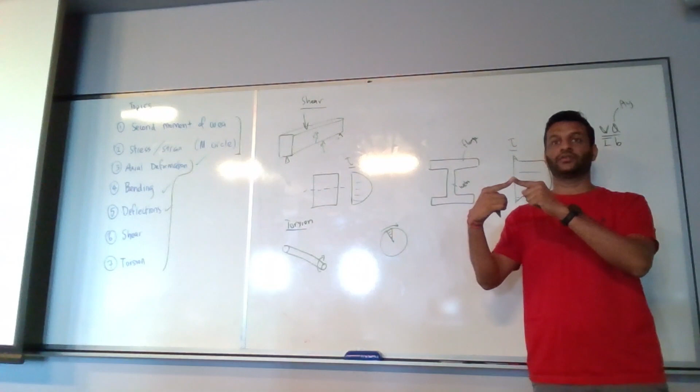For example, if you've got a circular rod and you twist it, what does the stress distribution look like? If I draw the cross section here for a circular rod, and I'm twisting it like this, the stress distribution will look like this. It's going to be largest at the point you're twisting it, and at the center of rotation it's going to be zero. Just imagine like a piece of jelly and you're turning it around, you'll kind of see how all the...

Get the idea? It's just because at the point where the force is applied, that's where you get the maximum torsion. There is another formula here for torsion - the main formula, I'll write it down again.

I won't go through it in too much detail, but basically it's a way to calculate the shear - again, it's a shear force, by the way, just a torsional shear force compared to this shear, which is normal shear. Get used to those terms: normal shear is a shear force caused by forces that are normal to the longitudinal axis of the member, while this is a torsional shear force from twisting.

And this formula here - again, I'm not going to go through that, but basically this formula is what you can use to calculate the shear stress at any point from the center of your shape throughout till the end. And of course, this is stress, so we need a physical deformation version of that, right?

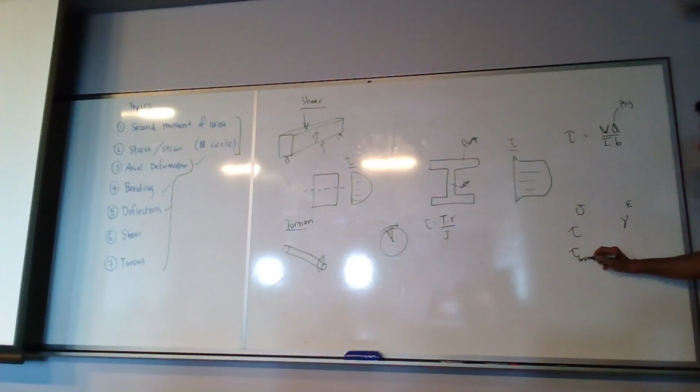For bending stress, what was the physical deformation for that? Strain, right - normal strain. For normal stress, the deformation version of that was strain. For normal shear, what was the physical deformation? Shear strain, which was gamma. Now for torsion, which is also tau, but I'll write here tau torsion - the physical deformation of this is... for example, in strain you'll have it in millimeters as well, and over here you can also have it in millimeters.

For this, it's also gamma torsion, but the physical manifestation of that is twist, which is an angle. Because if you take a certain element and twist it enough, you can say, oh, I twisted it 5 degrees, with respect to the center of rotation. So the question here would be: I'm applying this amount of torque on this thing, how many degrees does this twist by?

So there is a formula for twist, which I won't discuss here. But basically, if you have the torque that you're applying, the given length of the element, J is a torsional constant which is dependent on the geometric shape, and G is your shear modulus, which was in Henry's notes earlier, you can calculate the angle of the twist.

In a nutshell, this is the course. So if you look back at everything we've discussed today, what you're going to find is essentially what this course is about is applying forces on different things in different ways and calculating what's the stress and what's the strain, what's the physical deformation. If it becomes plastic, what is the plastic deformation? That's literally all it is.

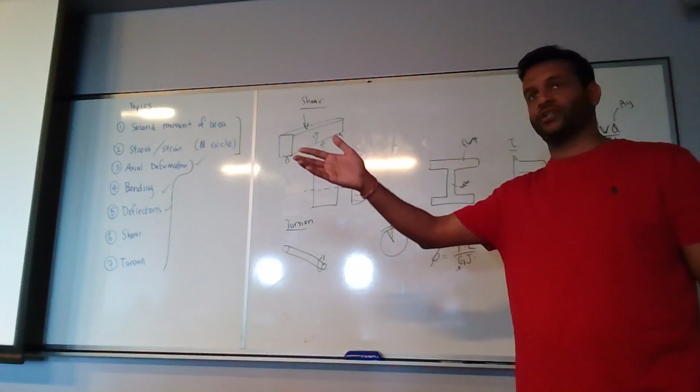analyze for a given loading situation, what are the stresses that are going through this element? What's the normal stress, what's the shear stress, and all that kind of stuff. Later on, after this course, in 3rd year and 4th year, when you start learning timber, steel, concrete, and all that, that is the other side of the story, which is, okay, now that you've already learned how to analyze a structure, you know there's 50 MPa of normal stress, this is how much it's straining, etc. Then the question is, can this concrete beam withstand that stress or withstand those forces? So that's the other side of the coin. That's the design side.

So this is, I think, one of the last few courses you're ever going to do on analysis. It goes into it fairly in depth, and that's why it's an ENG course, because it's useful in almost all engineering disciplines. But once those in civil start doing steel, timber, and concrete, then you're basically going to be checking whether for these stresses the timber will fail, the concrete will fail, the steel will fail. That's the other side of that story. So you'll never touch on analysis pretty much after this course.

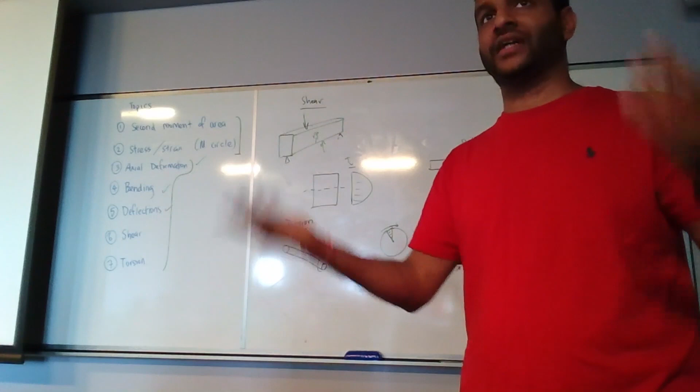Have you guys done structural analysis yet? No? All right, so that 2303, to be fair, doesn't touch on stresses and strains. This is literally the last course that touches on stresses and strains. That one other analysis course you'll be doing is basically get funky with moment diagrams and shear diagrams and just basically get it in a complicated structure. If you were to draw a building, what does the bending moment diagram look like for the entire frame? But it doesn't touch on stresses and strains.

One more thing just to mention, for you to appreciate the importance of understanding it well at this stage. Because if any of you want to do structural engineering later on when you start working, I promise you'll literally be doing these same things. Drawing out a stress diagram or a strain diagram is a big part of structural engineering. Even once I graduated and started working, I'd pull out my uni notes and hope I didn't forget what I was taught. So since you're about to start learning the course, if you're interested in that field, this is like your bread and butter, your fundamentals.

Any questions? Cool, right, no. Can I get a round of applause for that? Henry.

Yeah, I'm just going to do this last bit of the recording. So this is for the review questions. All right, this is our one player. This is Caden. Thank you, Caden.

So this is from Efficient Engineer, the YouTube channel. I don't know if you watched any of those videos for maths or whatever. Anyway, it's like a YouTube channel.

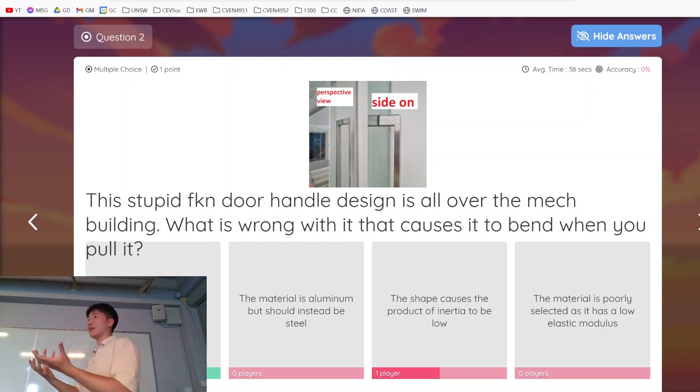So with your moments, you have two types, and it depends on your perspective. You have your bending moment, which is what we're talking about here - for a beam, bending moment's over the entire beam. And your torsional moment, which is what Prash was talking about in the last topic, where you're twisting. Product of inertia is to do with twisting, it pertains to that.

I probably should have picked that answer because we didn't even mention product of inertia. It's the thing which I said, the balance of the shapes and stuff. I kind of only talked about it mathematically, I didn't really talk about it. Is that product of inertia? I X Y, yeah. And on your Mohr's circle, it's your up and down axis - that's your product of inertia.

Dude, it's like going back through the unit circle, I never remember anything about it. So then I had no clue what I was doing in this one.

Oh no, it's basically a hollow section. So to get your area moment of inertia, I'm just trying to demonstrate here that you can subtract off components as well. So it's your big shape minus your small shape. That's pretty much it. I just did a bit of a trick here because I said that big B is equal to big D.

Oh, it's the power of 4 because we've only done the stuff to the power of 4. It's only to the power of 4 because it's the shape - because it's a square. So a rectangle has a different width and different depth.

Wait, so when we were doing the questions, b to the power of 3 - was that for a rectangle, was it the same thing? Let me get a mark. So I, for a rectangle, something like that, was b d cubed on 12. And if this is for a square, what do we know about a square?

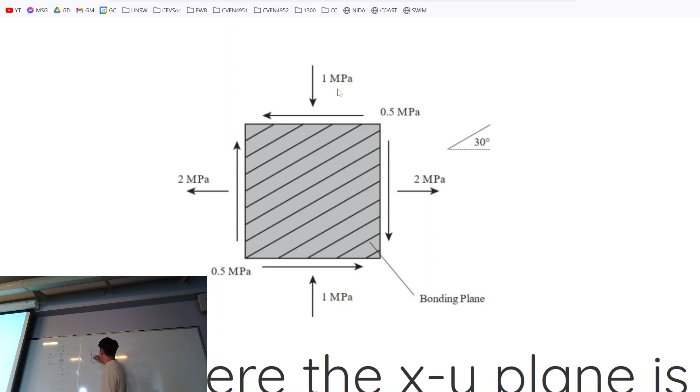Guys, remember we haven't even started. You guys are well and truly ahead of everyone. It's fine, you'll be fine.

So this is just plugging in Mohr's circle numbers. You got this one right, which is good. Both these values that were given are the values at the center.

Okay, and tau xy—so it'd basically be one point here and the other point here. So your Mohr's circle xy line is straight, bang up and down. And then it's asking how you find these points. Half the time for this question was me literally just reading the options and seeing the vibes. But do you understand now after the explanation? It's just circle geometry.

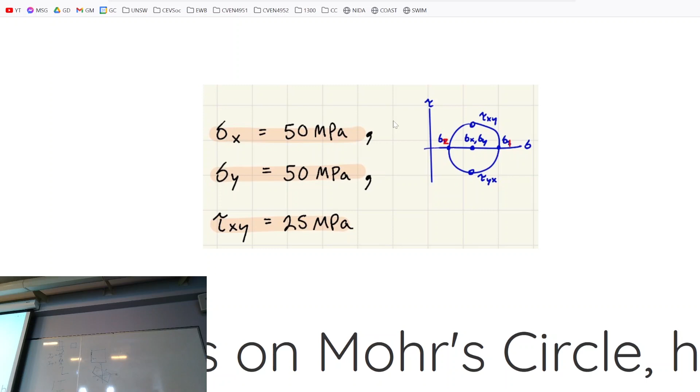Did I answer your question? Wait, what was your question? So no, because the case is different, right? Because that's the stress in the x direction and the stress in the y direction. But in the next example, they're not the same. So then how, in what way? If the shear stress is not zero, then what would this diagram look like? Oh okay, I see what you're talking about.

Basically, what is given in the question are just coordinates on the circle. This circle represents any of the possible numbers this could be as it's being rotated.

So what would the maximum shear stress for the circle be, like what it could experience with these numbers? Wouldn't it be like, if the shear stress was 25, it'll be 25 from the very top of that circle?

Okay, so you're given a different set of numbers, right? Say we're given this, right?